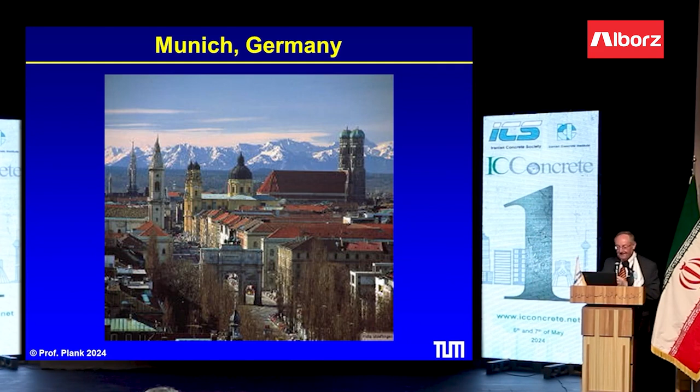But first of all, briefly about our group. I'm coming from Munich in Germany, which is in the south of Germany. We also have some mountains, but not as high as your mountains here in Tehran. And a speciality of our university is that we have close links to the industry.

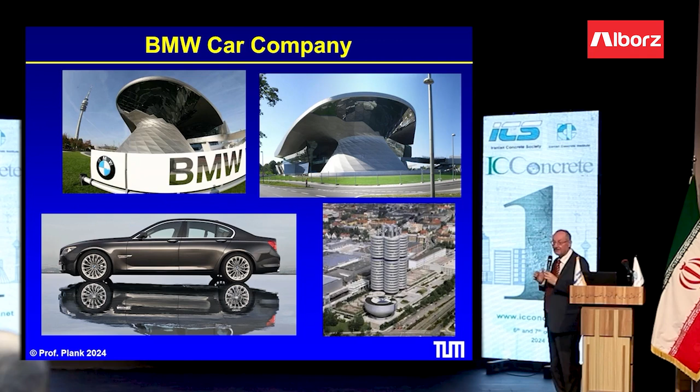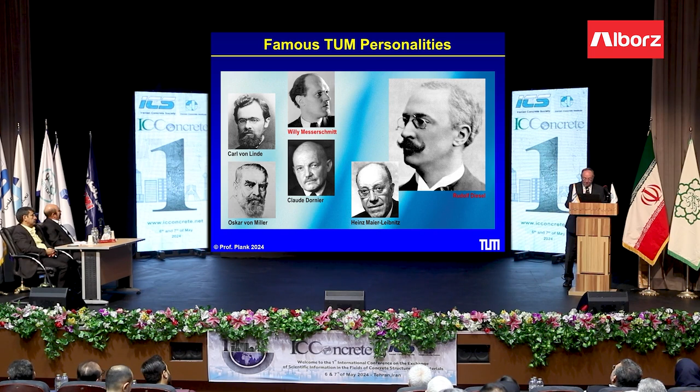In the Munich area, there are numerous large and also mid-sized companies in different fields like BMW, which you probably know. Our university had some rather well-known students like Rudolf Diesel, who invented the diesel engine, or Willy Messerschmitt, who invented the jet propulsion, so he made it possible to go from the propeller airplane to the jet airplane. Then our university had six Nobel Prize winners so far, and I'm in the chemistry department, and four of these Nobel Prize winners are from chemistry.

About our research, we focus on cement chemistry here, and then admixture chemistry, and this is really our specialty worldwide. I think we are one of the leading groups in this field, and we study the interaction between cement and admixtures, and we also work on other chemical compounds for dry mix mortar and so on. From the application, it's concrete, dry mix mortar, energy harvesting materials, as was mentioned, and a speciality in our group is we work on additives for oil well drilling, cementing, and fracturing fluids.

And I mentioned this before, nowadays students are very interested in IT and artificial intelligence and business management, so how can we attract them into construction?

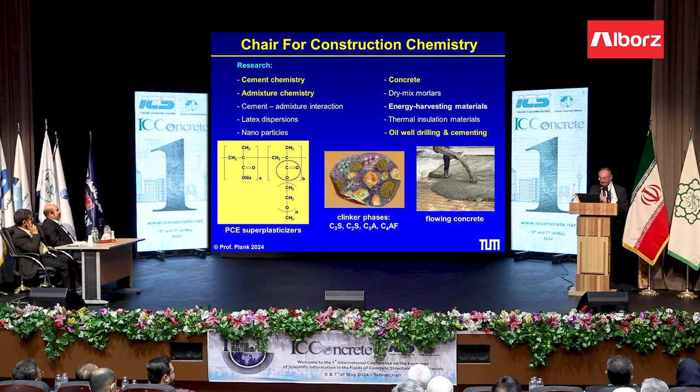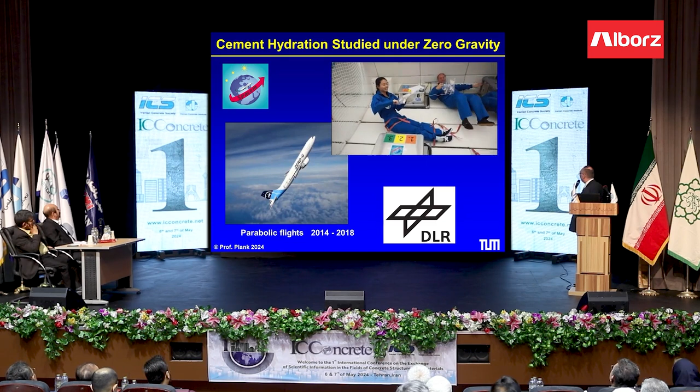We had the unique opportunity to do experiments with cement under zero gravity. As you can see here, we performed them on parabolic flights where you have zero gravity. By the way, this is Dr. Lei, one of my students who is a professor in China now. And we got very interesting insights into the hydration of cement, especially the formation of CSH.

Now, this is the context of my presentation. At first, the definition of high-performance concrete, then PCEs for high early strength, and then the big topic, low clinker cement and low cement concrete. Which solutions do we have? One is with ground granulated blast furnace slag. The other is with calcined clay. And then how to optimize the rheology of concrete. Very recent developments in this field and outlook.

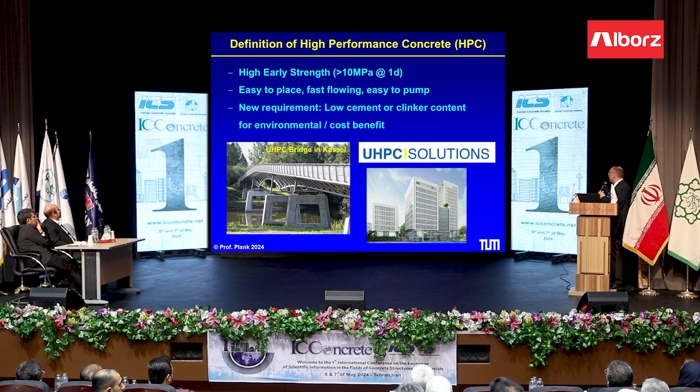High performance concrete we define as a concrete which reaches very high early strength within a day, actually ideally within 16 hours, 10 megapascal, and the final strength has to be beyond 60 megapascal, like 100. And at the same time, it should be easy to place, fast flowing, and also easy to pump. I will talk especially about this because this is not so easy to achieve in such a concrete. And a new requirement is that it should have a low carbon footprint because of a low cement content or a low clinker content. And this is not easy to achieve.

Superplasticizers, PCEs, are necessary to achieve this. At first, a short overview of the PCE technology which we have nowadays.

The first PCEs in 1981 were MPEG PCEs based on methacrylic acid and methacrylate ester. Then came the allyl ether PCEs from Nippon Oil and Fats.

And then at SKW, we developed the VPEG PCE. And this technology was acquired by BASF, as some of you may know.

I framed these two in green because these are still the most widely used PCEs in Europe. In Asia, it's completely different.

There, HPEG and IPEG or TPEG PCEs are dominating. They have a different alcohol here, as you can see, as compared to those.

And very recently, EPEG PCE, which has an ethylene glycol unit here, and GPEG PCE, which has a diethylene glycol unit, were introduced.

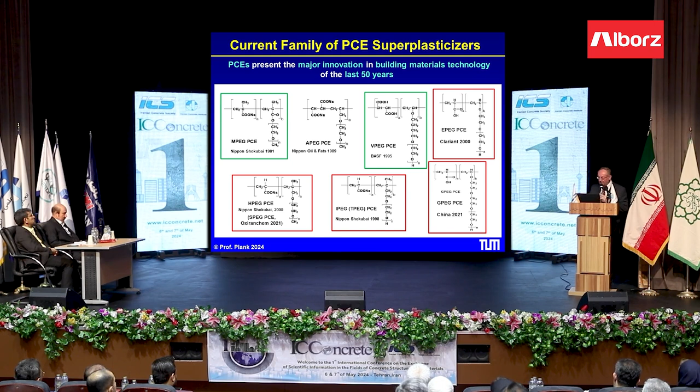As this is really very new on the market, the PCE industry is continuously developing further. Although it is 40 years of PCEs, it's by no means finished.

Now, the previous speaker talked about water-reducing PCE. Here it shows the structure.

This is a high-range water-reducing PCE. It has many carboxylate groups in the main chain and a few but long side chains.

And this is a typical composition from HPEG PCE. 89 is the number of EO units here, and 6 is the molar ratio of acrylic acid to the macromonomer.

So these high-range water-reducing PCEs actually look like a star polymer.

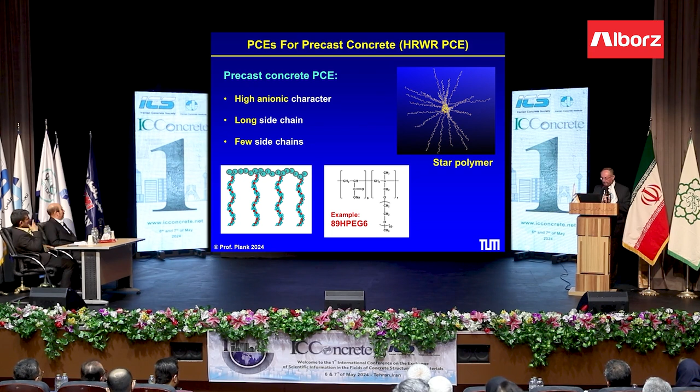Then a slump-retaining PCE, which is used in ready-mix, has many side chains, as you can see here, not so many carboxylate groups, and nowadays we use also hydrolyzing esters in the PCE.

Hydroxyethyl acrylate and hydroxypropyl acrylate give super long slump retention.

You can reach 3 hour, 4 hour of slump retention. And in some countries like China, this is very popular.

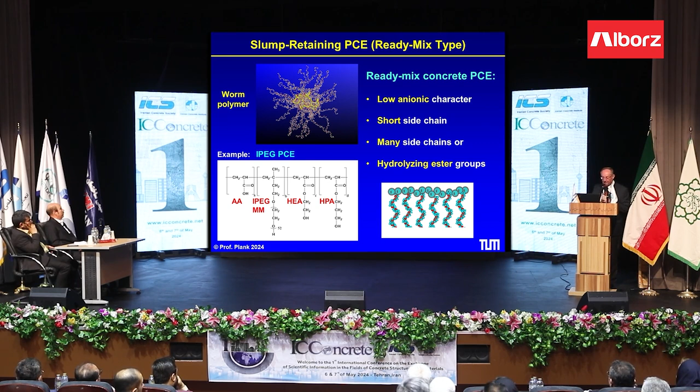Then I mentioned EPEG PCEs, where we have the ethylene glycol unit here. They were, I should say, again introduced to the market in 2019 in China.

Oxiranchem was the first to produce them. And why are they superior?

Their production takes only 1 hour of polymerization time versus 3 hours for HPEG and IPEG. And on top, they are also more dosage effective.

So this is a very interesting new development. I'm sure in the industry, over the next years, we will see more and more EPEG-based PCEs on the market.

Now I come to a major challenge for the cement and concrete industry, and this is the CO2 emission.

When we produce 1 ton of Portland cement, then we release almost 1 ton of carbon dioxide, and therefore the cement industry contributes very much to the CO2 emission and global warming.

And if we look at the list of top cement producers, we see that China is of course #1, followed by India, US, Vietnam, Turkey, and Iran.

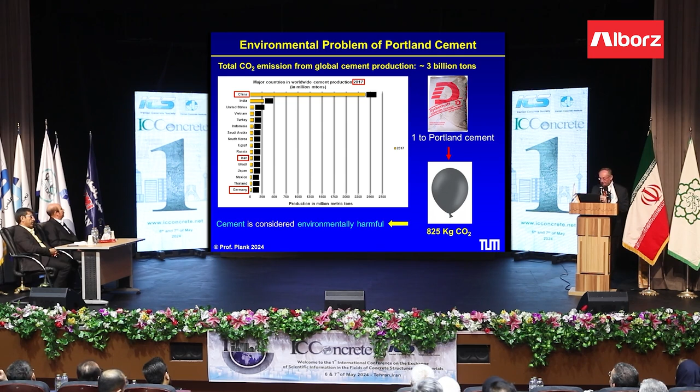But the total global cement industry produces about 8% of the total CO2 which is released. And by the way, this is more than a country like India releases, so it's really significant and we have to do something about it.

What can we do? We can capture the CO2 in the cement plant from the exhaust gas, compress it to a supercritical fluid.

And then transport it, let's say, to oil fields and inject them into depleted oil fields. This we call CCS, carbon capture and storage.

It's a good way to dispose CO2, but very expensive. It's already done in the North Sea, so we know the cost.

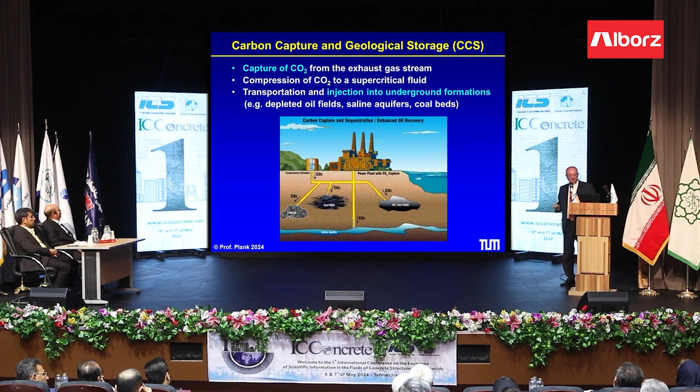The cost is about 80 euros per ton of cement, and this cost will be added to cement, so this will make cement very expensive.

The other possibility is that we use pozzolans, as has been mentioned in the presentation before about natural zeolite, and basically reduce the clinker content in the cement.

By using fly ash, slag, and most recently calcined clay has become very popular.

And by doing so, it is possible to become climate neutral with the cement formulation.

We need to be below 400 kilo to be climate neutral, and so this is possible. It means the clinker factor in our cement has to be less than 50%.

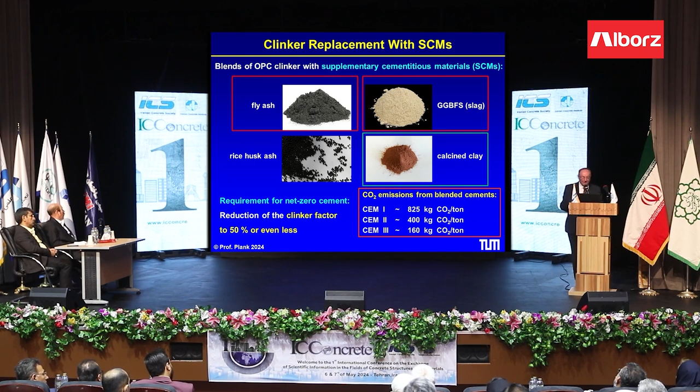So for the cement industry, you can see this is a very big challenge and a very big change.

Now, cement comes with a high CO2 emission, concrete actually not. Here we have the global warming potential of concrete.

It's 130 kilo CO2 per ton or 300 kilo per cubic meter, which is not too high, but the problem is we produce such enormous high volume of concrete, about 25 billion tons.

And therefore this large CO2 footprint. And we analyzed the CO2 contribution of different components, and as you can see, cement is 96%.

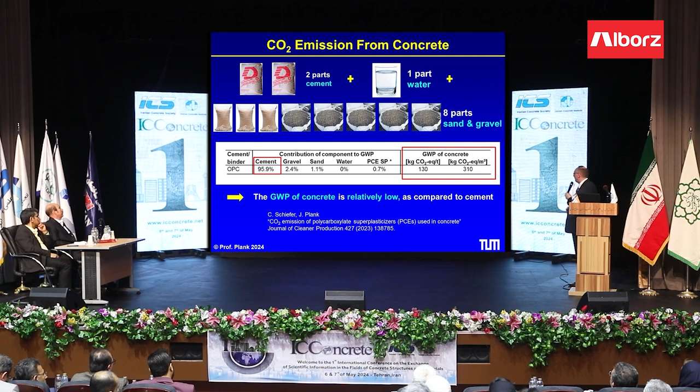This is where the CO2 emission comes from. The PCE is basically close to zero, not important.

So the global cement industry has two ways to reduce their CO2 emission. Concept one is this carbon capture and storage.

This allows the industry to keep their current business model, but the cost for this will be very high. We know in Europe the estimated price for cement where carbon capture is done will be above 200 euros per ton. I heard in the days before that the price of cement in Iran is only 2 or 3 euros per ton.

So we are so far away, and it shows what a cost burden this technology would bring. The other concept, number two, is to dilute the clinker with reactive SCMs, with reactive materials such as zeolite. It will keep the cost for the cement low, but it introduces a fundamental change to the current business model of the cement industry, because their clinker will be a minor component in the cement, and the other materials will be the major component. So for them, regarding the business model, it is a real challenge. We will see what the future will bring here.

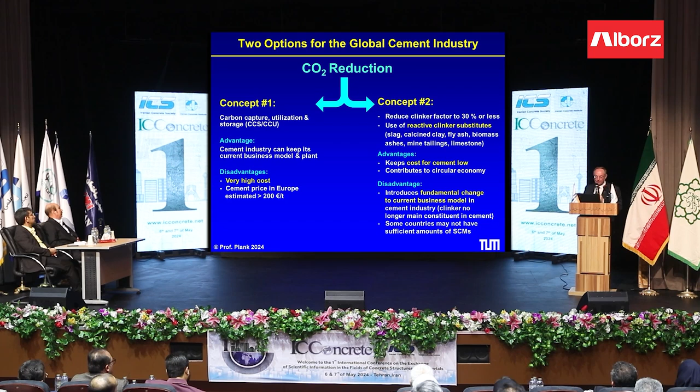Now about slag cements, especially in countries like Vietnam and India, slags are very abundant, and a lot of work is done. Also in Western Europe, like in UK and France, we cooperated with some companies on these low clinker cements. You can see we reduced the clinker content to 40%, 30%, 15%, and at the same time increased the slag content. So here you can see the clinker is no longer really the main component, it's the slag. Because the slag reacts relatively slowly, we need an activator, an alkaline activator. Here we use sodium sulfate. And the problem with reduced clinker content is that the strength gets lower.

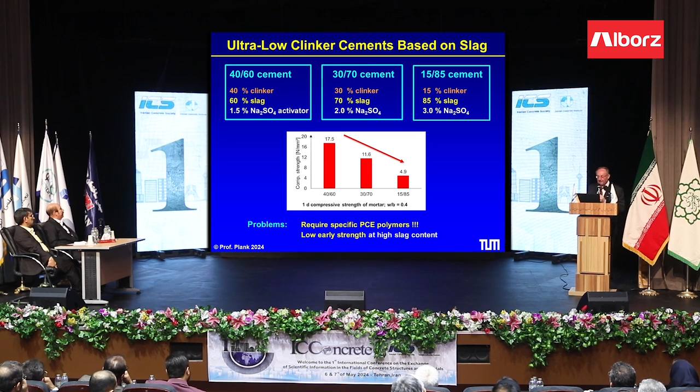This is the one-day compressive strength, and so we need to find a way to increase the strength, and the easiest way is to reduce the water to binder ratio. But then you have a workability problem, and this is where the superplasticizer comes in.

Another example, this is an ultra-low clinker cement with high limestone filler content, and you can see 20% clinker, 20% slag, and a lot of limestone. If you go to a very low water to cement ratio, you still can get 10 megapascal after 1 day and 60 after 28 days. So with this cement, you have a cement with very low carbon dioxide emission. We call it a climate positive cement, which means it reduces the CO2 emission more than what we need, and still we can get very attractive strength data. But the key is the superplasticizer.

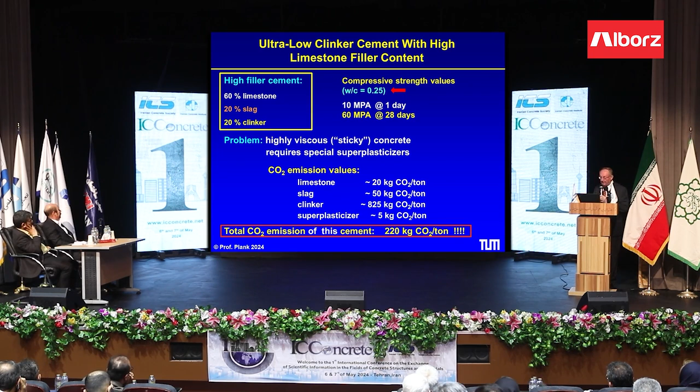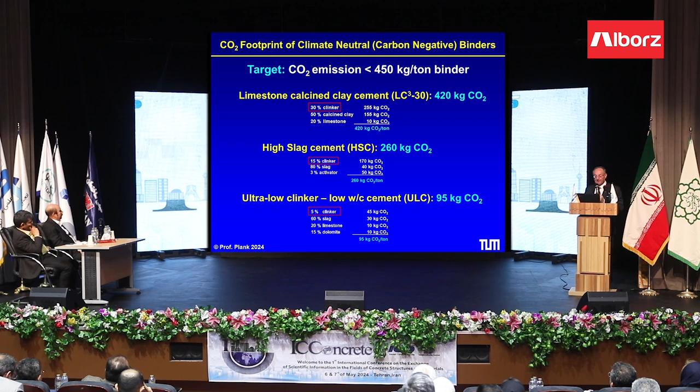If you work at this water to cement ratio, you need a very powerful PCE. Some other examples, and this is really what we work a lot on in Europe, these climate neutral, carbon negative binders, like this one with calcined clay. Please take notice here, it's LC3-30, which means it has only 30% clinker - the common LC3 has 50% clinker and therefore is not climate neutral. Or a high slag content with 80% slag, or this ultra low clinker cement with 5% clinker, which is something they use in India. So you see it is possible to formulate very climate friendly binders.

Now, a problem with slag cements is we need alkaline activators to get early strength, like sodium sulfate, carbonate, silicate, sodium hydroxide, and we use them in a relatively high concentration, like 2%, 4%, even 8%. In these activator solutions, normal PCEs are not soluble, and if they don't dissolve in the water, they cannot be active as a superplasticizer.

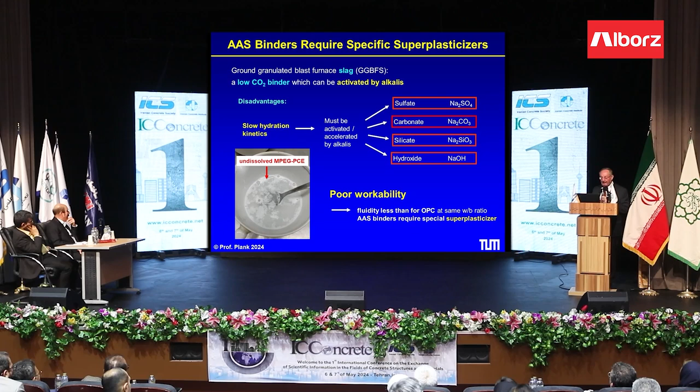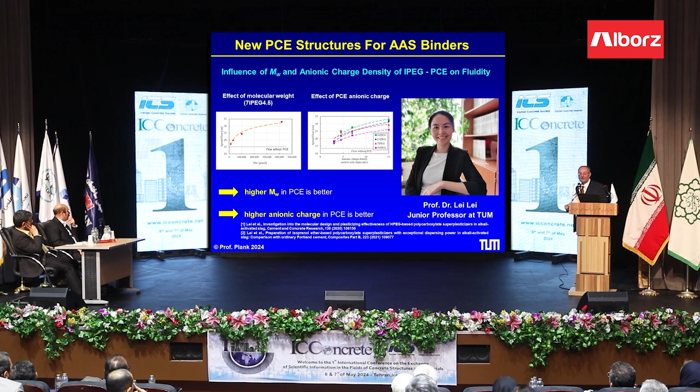So when we use these binders with these activators, we need new superplasticizers. Dr. Lei, when she did her habilitation at our university as a junior professor, worked on IPEG or TPEG PCEs, which dissolve in these activator solutions and remain effective. She found that you need a higher molecular weight and also a higher anionic charge, and then you have excellent superplasticizers even for those systems.

Another solution for these slag cements are so-called zwitterionic PCEs, where we incorporate a cationic monomer also into the PCE. As you can see here, in a slag cement, they give very good fluidity and also very long slump retention, 3-4 hours, so they work very well. The only slight disadvantage which they have is that when the dosage is high, they reduce the very early strength. This is the one-day strength, but after 3 days, there is no such effect anymore.

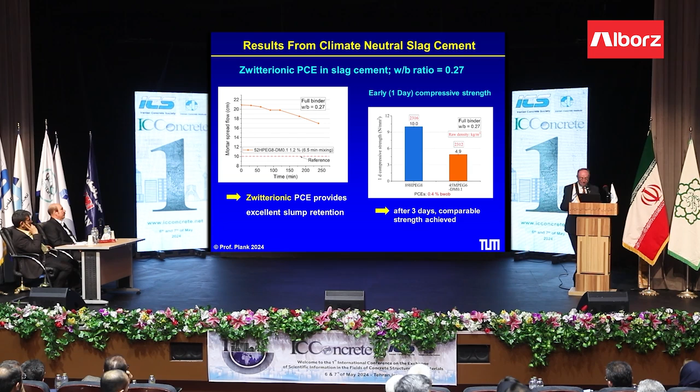So what I want to say is these new green binders require differently composed admixtures. We have to change the molecules to be effective in those systems, and the PCE industry has many ideas how to accomplish this.

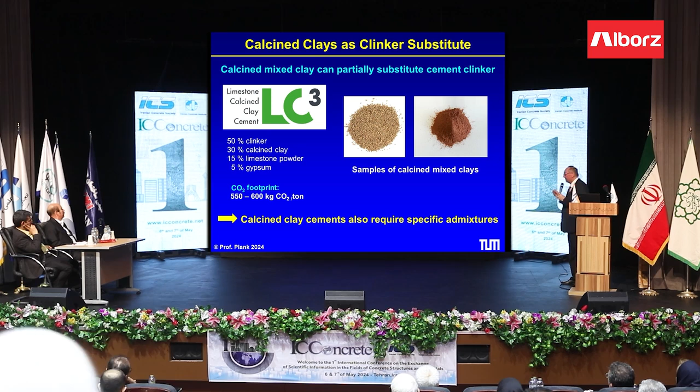Now, calcined clays are talked about a lot, especially LC3. Here you see the LC3 formulation: 50% clinker, 30% calcined clay, 15% limestone powder and gypsum. This has a lower CO2 footprint, but it is not climate neutral. So it's a big step forward, but it is not what we really need to accomplish, and therefore we are working very hard to improve it.

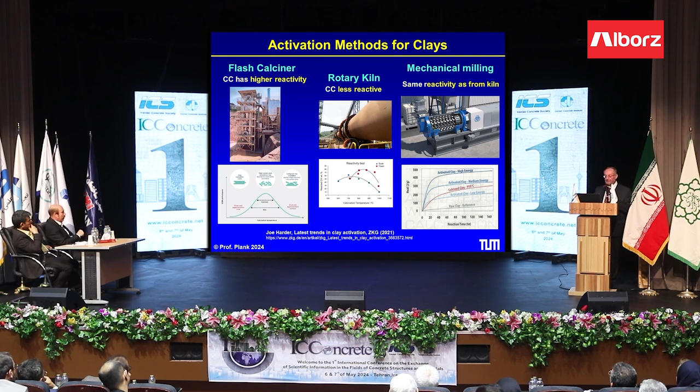Now, calcined clay, there are different ways to do this. In a flash calciner, it gives the highest reactivity of the calcined clay. In a rotary kiln, maybe this is more convenient, but the reactivity is a little bit less. And very recently, ThyssenKrupp introduced a mill where you take the raw clay and just mill it, mechanically activating the clay.

It's the cheapest way and the most convenient way to have activated clay as a clinker replacement. Now, a commonly known problem of calcined clays is that they require much higher PCE dosages.

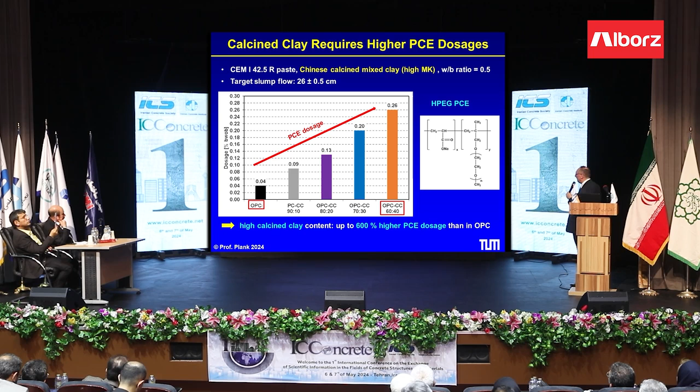If we substitute OPC with calcined clay more and more, you see the PCE dosage goes up very much. Here we use the HPEG PCE, especially with a calcined clay from China with a high metakaolin content. If the metakaolin content is high, this calcined clay needs very high PCE dosage, and obviously this is not very good because it increases the cost.

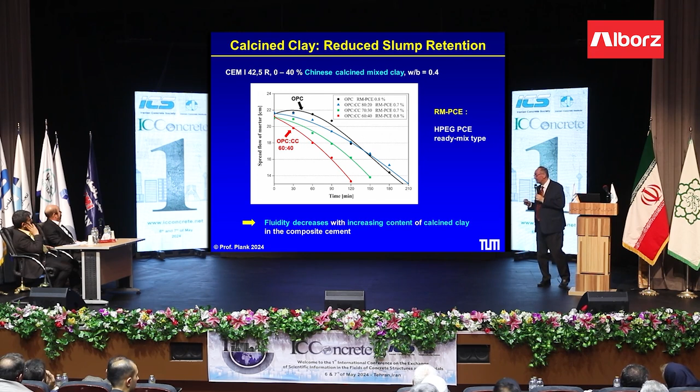Another problem of such calcined clays with high metakaolin content is that slump retention is very difficult to accomplish. The previous speaker mentioned slump retention and that we have different technologies, but all these existing technologies do not work in such a blended cement where we have, let's say, 40% calcined clay with high metakaolin content. We and other groups are working very hard on new admixtures which can give reasonable slump retention in those binder systems.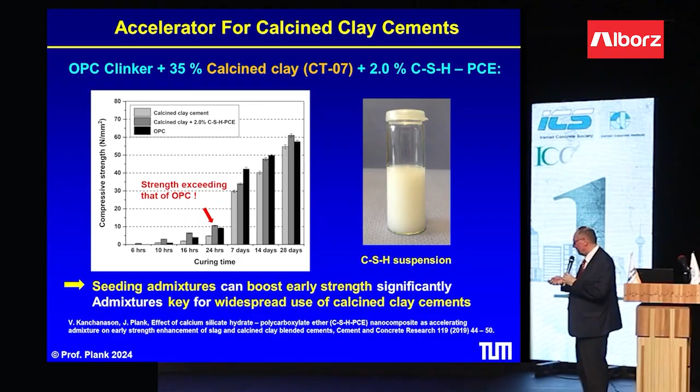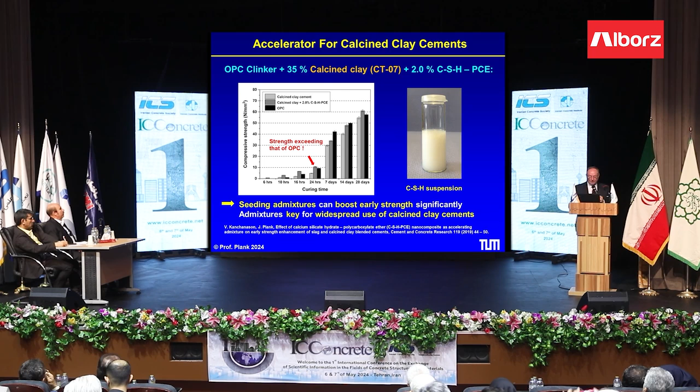So we need an accelerator to get high early strength in Germany. The one-day strength is very important -- companies always want at least 10 megapascal after one day. So we designed an accelerator, which is a CSH nanoparticle suspension. As you can see in the data, it gives more than 10 megapascal after one day, after 7 days, and so on. With these admixture accelerators, we can solve this problem.

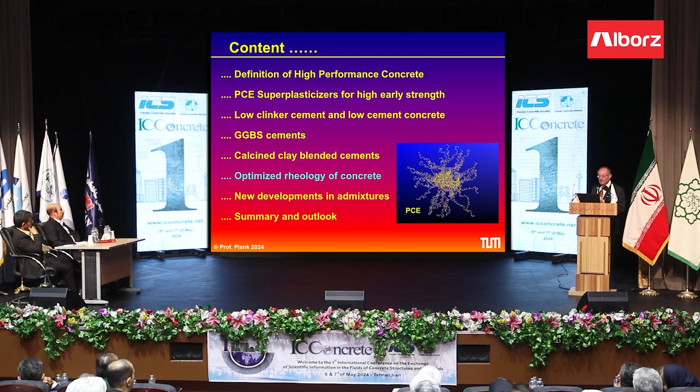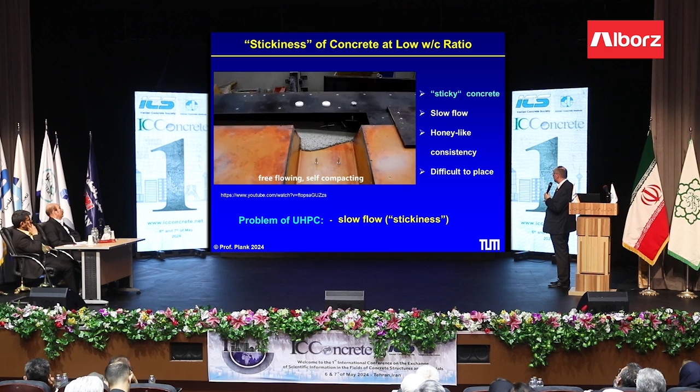Now, let's come to optimized rheology. A big topic in Germany is the stickiness of concrete, and as we go to lower and lower water-to-cement ratios, this problem becomes very severe. Here I show a concrete formulated with a water-to-cement ratio of 0.28, and it flows very nicely, but very slowly. It's sticky like honey, and of course on the job site you don't like this.

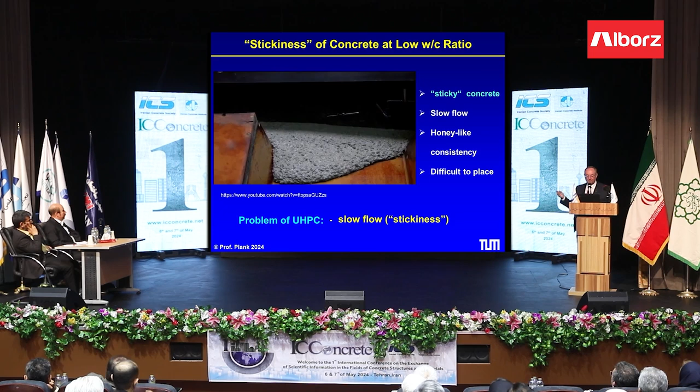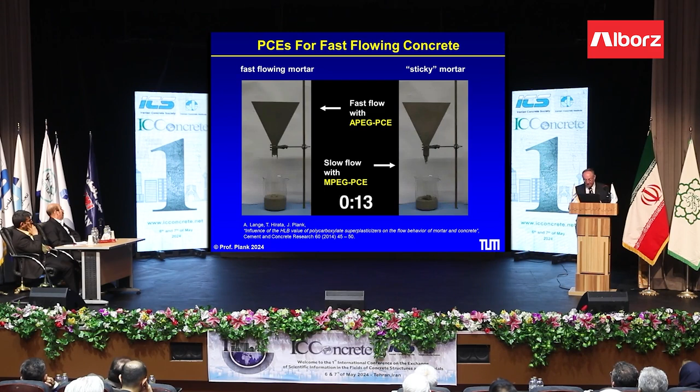We tested different PCEs -- allyl ether PCE gives a much higher flow speed than an MPEG PCE. So the type of PCE already has an influence on whether you have more or less stickiness. But like I said, in Germany we use a lot of MPEG PCE, so the question was, how can we also improve the MPEG PCE?

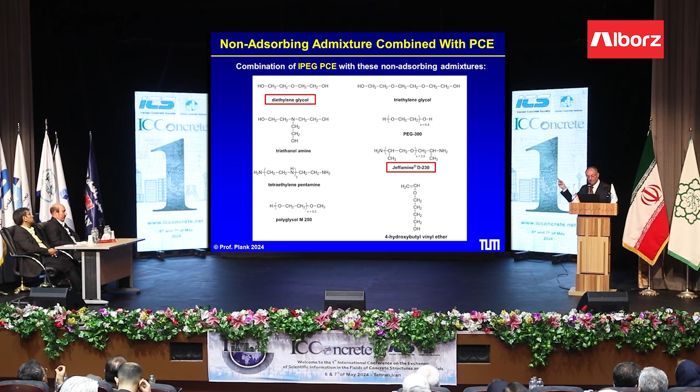The solution we found is if we combine the PCE with a small molecule alcohol, a diol -- for example simple diethylene glycol, triethylene glycol, or PEG 300 -- or even some amines which we use as accelerator, you improve the flow speed of concrete very much. So by formulating a PCE solution with these simple alcohols, it's possible to increase flow speed. The reason is that they reduce the plastic viscosity of concrete.

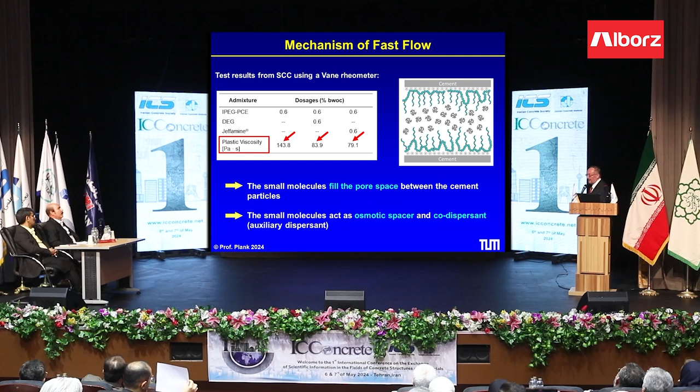Another possibility to reduce the stickiness of concrete is to use a phosphated superplasticizer. BASF has introduced PAE, polyaryl ether admixture, which is a formaldehyde polycondensation product. Here we see phenol, phenol phosphate ester, and a phenol ethoxylate. By polycondensating, one gets a polyphosphate admixture, which works very well at low water to cement ratio and gives a high flow speed.

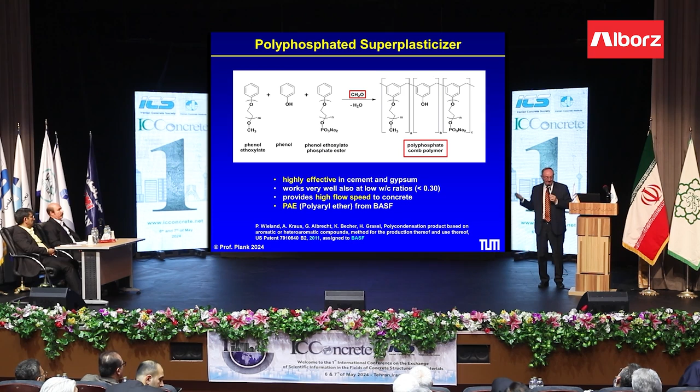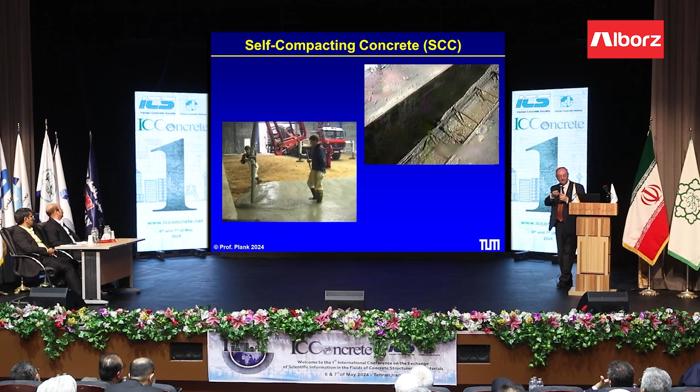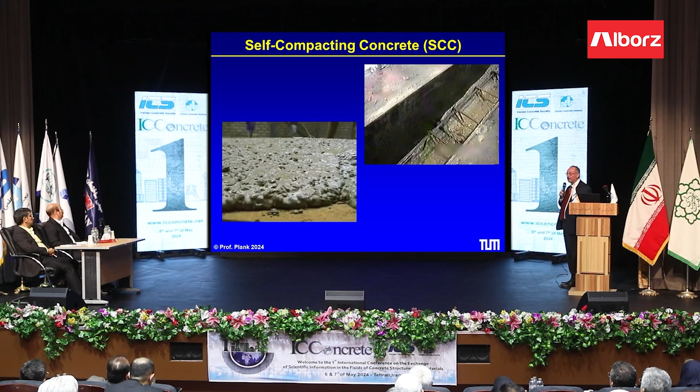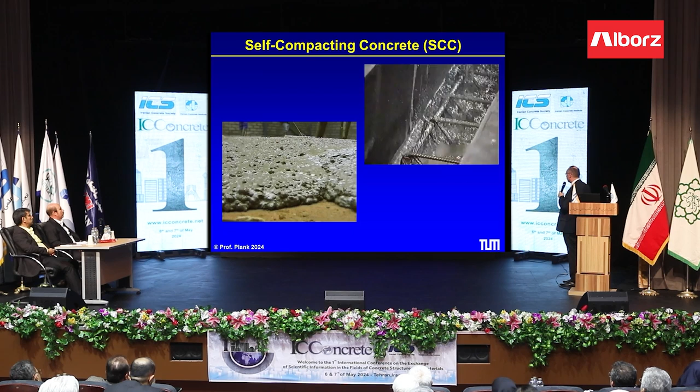So there are different solutions, and with this I just want to point out our creativity in molecular design enables us to solve such problems. Self-compacting concrete, as shown in the presentation before, is very common in Germany. In precast concrete plants, I would say 80% of the concrete produced is self-compacting concrete, and this relies heavily on PCE admixtures, specific formulations, and mix design, which has been addressed before.

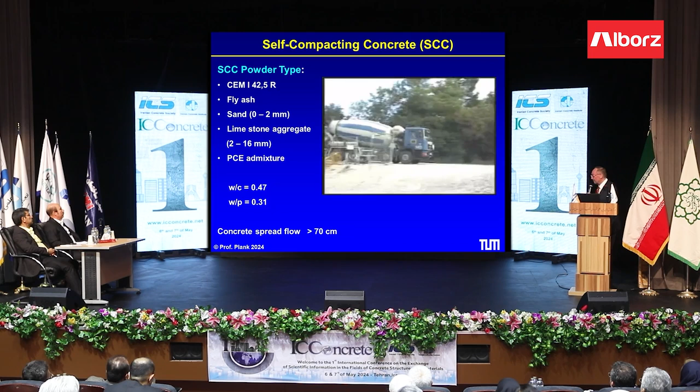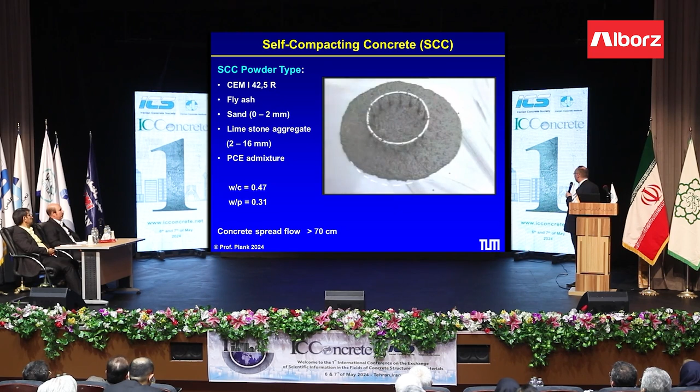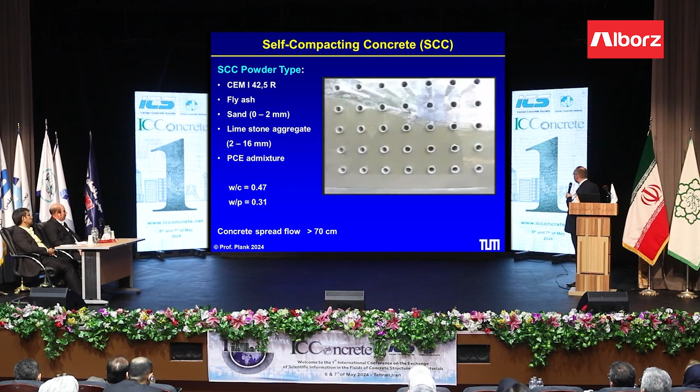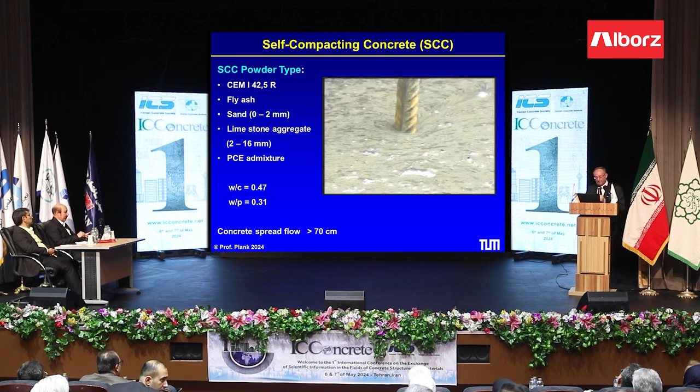Let me show a short video of SCC. We call it a powder type, based on cement, fly ash, sand, limestone aggregate, and a polycarboxylate admixture. This is the J-ring test — you see very good flow behavior, no segregation behind the steel bar. This is the L-box test, and you see no voids, no empty space around these pipes. This is a perfect self-compacting concrete, and here you see how it releases the air itself. SCC doesn't require much compaction — it is self-de-airing, and this is possible with advanced admixtures.

Now briefly, because of time, I hope it's okay — some very new developments. When we polymerize PCEs, normally we get a random or statistical distribution of the side chains along the main chain, and such a molecule has a limited ability to interact with the cement surface. But if we can make a gradient polymer, where we have some blocks of carboxylate groups, the interaction is much stronger and we have a more effective molecule.

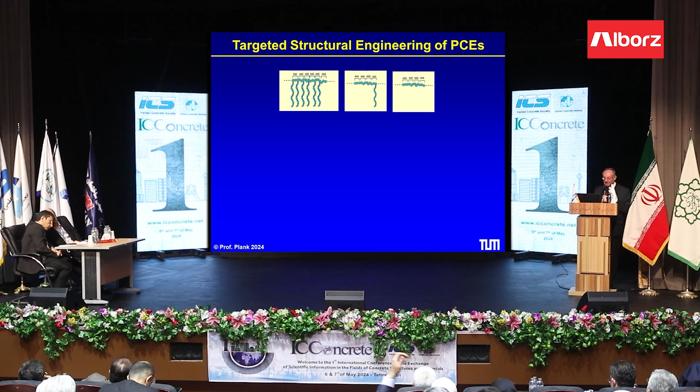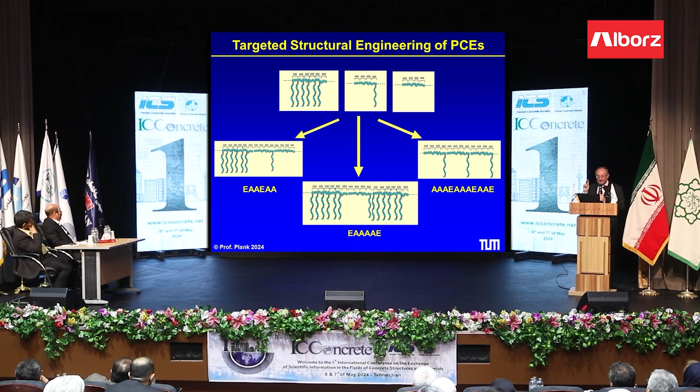This is what we have been working on recently, designing specific PCE structures in a targeted approach. We can make molecules now with a block of many side chains and very few elsewhere, or two blocks of dense side chains with none in between, only carboxylate groups, or mixtures of these. With such targeted design, it is possible to improve PCE performance significantly.

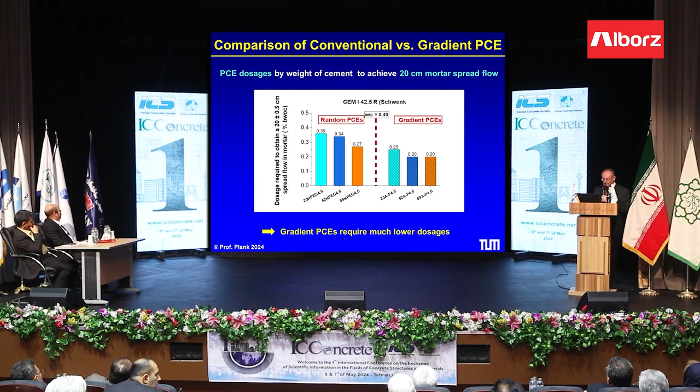Here I show a comparison of different HPEG PCEs with different side chain lengths. The molar ratio is constant, and they are made in the conventional method. These are the dosages needed to reach 20 centimeter spread flow. If we make them as a gradient polymer, the dosages are about one third lower to get the same spread flow. So these optimized molecular structures can make them a lot more cost effective.

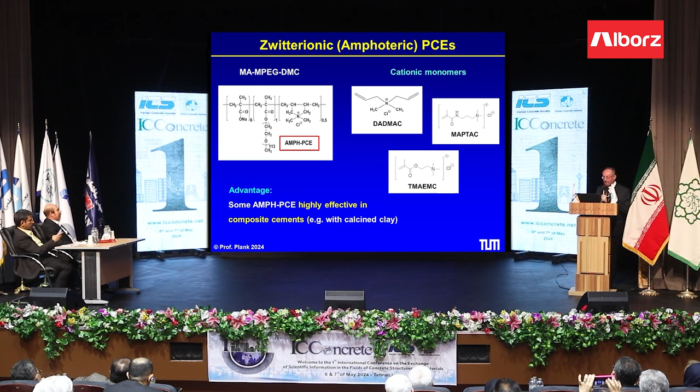Also recently we did research on what we call amphoteric PCEs, where we also have a cationic monomer alongside the carboxylate in the PCE molecule. These polymers are very interesting for high calcined clay blended cements, for example, and they give very high flow speed, as we found in the V-funnel test. We had an OPC slag mortar, which we filled into the V-funnel, and the empty time was only 29 seconds with the zwitterionic PCE. The conventional PCE took over 100 seconds, and another reference product took 300 seconds.

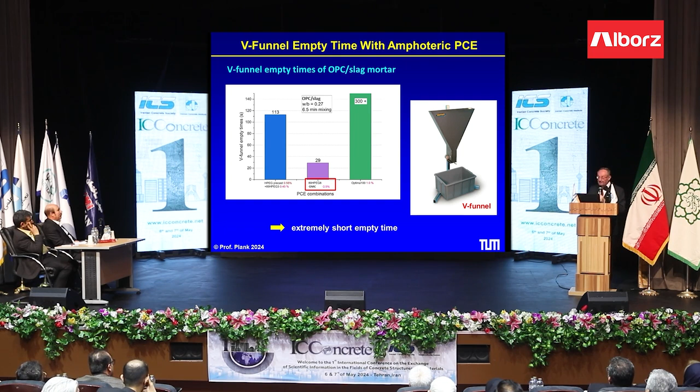So, with this very targeted molecular design, we can get very nice specific properties. This brings me to the conclusion. I have worked over 40 years in the field of chemical admixtures, and at first, I have to be honest, I found it sometimes a little boring with cement, concrete, and mortar. But we developed products which were used on very spectacular buildings, and seeing that you create something which really makes an impact on this industry gives a lot of satisfaction.

For example, the Petronas Towers in Kuala Lumpur were built with our superplasticizers, melamine formaldehyde-based superplasticizers. Then the Burj Khalifa used our VPEG PCE from BASF, and the Hassan II Mosque in Morocco also used VPEG PCEs from BASF — just to mention a few examples.

So if I'm saying this to the young students perhaps here — if you enter this field, you will perhaps also create something where later you can look back and say, well, we created something really useful, not just a PC program or something which will disappear soon. It has a very lasting effect.

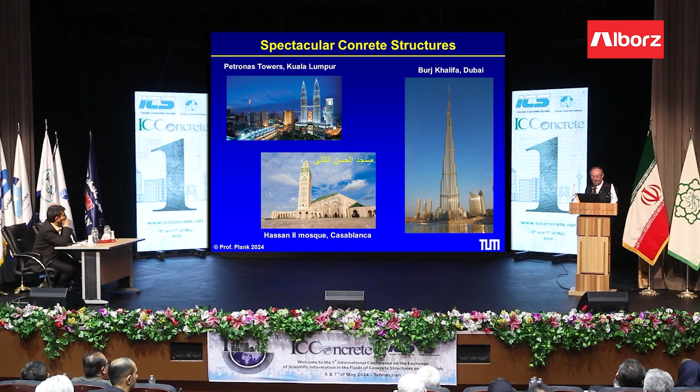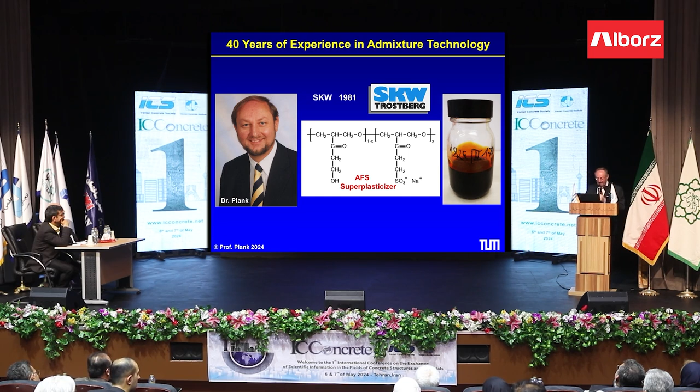I started my work in admixtures in 1981. I joined the company SKW, and my first superplasticizer, which I developed, was this acetone formaldehyde superplasticizer. This is the original bottle — it was batch number 17 when we were successful, and this is shown in an admixture museum in China now, where they have very interesting exhibits. At SKW, I was research director, and we developed these VPEG PCEs, which later became known under the label Master, and the co-worker who did the lab work was Dr.

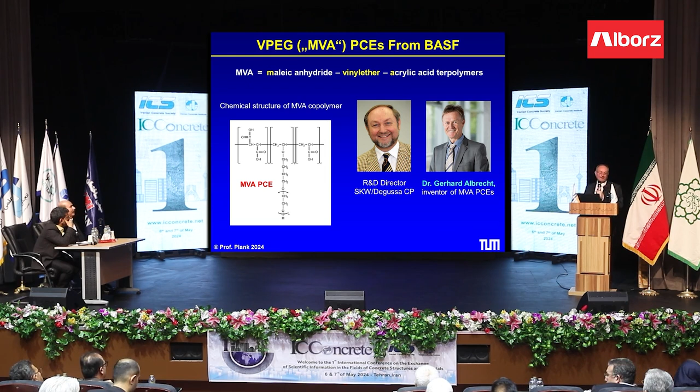Albrecht, who played a very important role also in the recent development of the VPEG PCEs. Let me show what we have contributed with our PCE.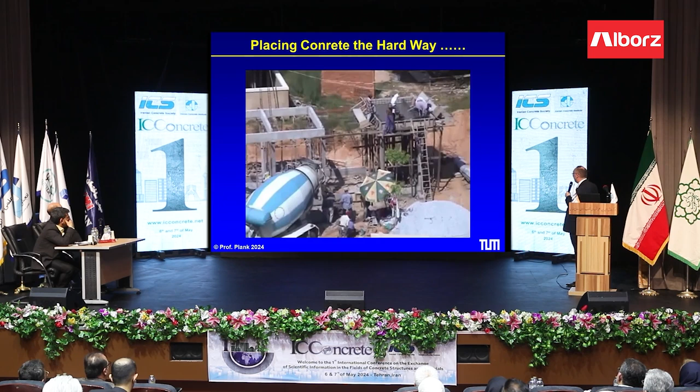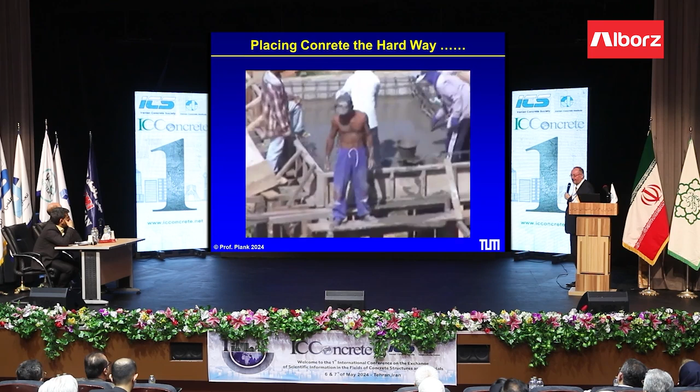This is the old way of delivering concrete upstairs to a house which is built here, and look at these guys here, very strong to throw the bucket with concrete up and empty a full truckload of concrete. This is really hard work.

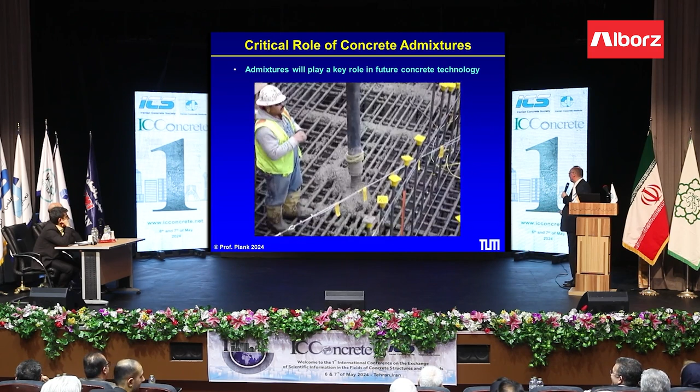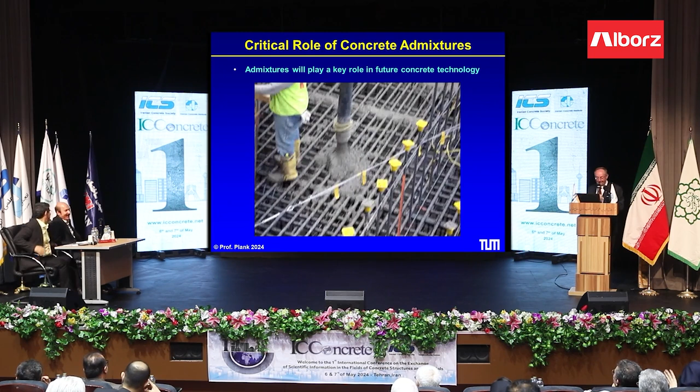By the way, this is a job site in Thailand, and the modern way using PCEs is this. We can just dispense the concrete, the worker can watch it, enjoy a drink, and no hard work, and you see he disposes the bottle in the concrete. That's a modern way of environmental carefulness.

Finally, I should mention, because we have a very long tradition in PCE research, in 2015 we started to hold a PCE conference, an international PCE conference, and since then we do it every 2 years. This year in September, we are going to have the 5th International PCE conference. This time it will not be in Munich, Germany, but it will be in Bangkok, Thailand, because many of our attendants in previous conferences said it would be easier to travel there. It's maybe also cheaper - Munich is an expensive city. So if you are interested, you are most welcome to join us. We will have really a focus on this industry from, I would say, from the Middle East to Asia, like China, Japan, and so on. So you will see a very international crowd.